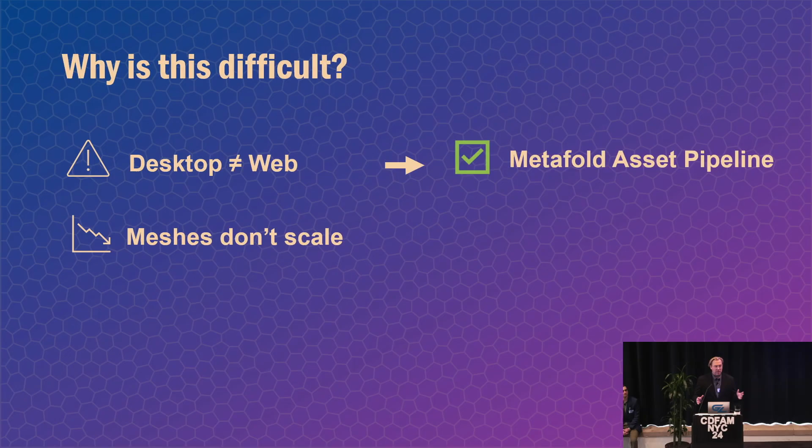The second problem, and you'll see more of this in the second part of the presentation, is that the digital materials platform leverages lattices and complex geometry to achieve these amazing mechanical properties. Representing these as meshes does not scale, partially from a computational point of view, but also just like a download point of view, a user experience point of view. You might wait a really long time to see the result if you're waiting for a very large mesh file.

So the Metafold platform at its core is our own implicit geometry kernel, and that's one part of our IP. The second part is a geometry streaming technology that lets you transmit volumetric data from a server to a client in 200 to 500 milliseconds.

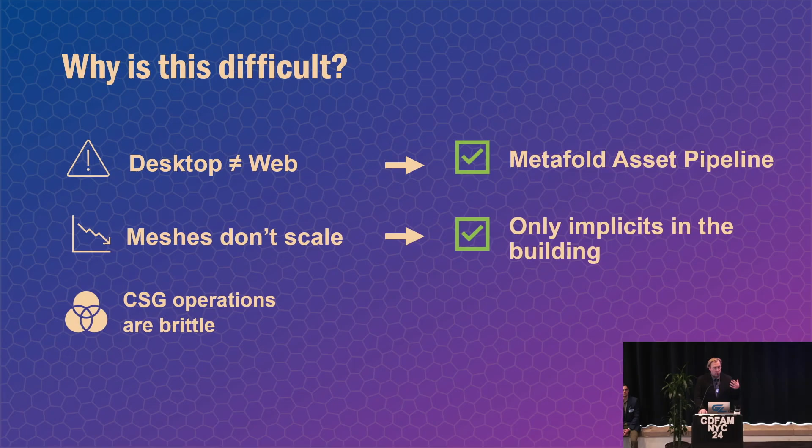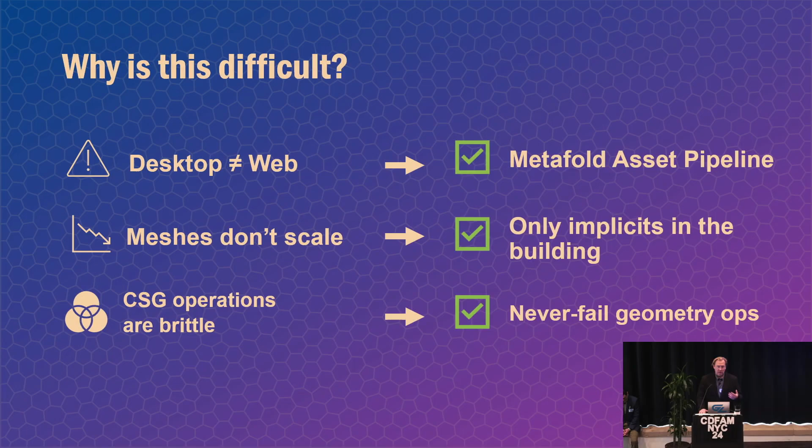The third problem is to create a final product using lattice geometry and infill type structures, you will inevitably need to CSG or union these structures back with an original design space, and these are notoriously brittle operations to complete. The Metafold geometry kernel shares with other implicit libraries the concept of a never fail geometry operation. Volumetric and implicit operations will never not work. They might not give you what you want, but they will never not work. Just having that functionality means that you can really build these automated workflows and get robust results.

So that was kind of like the glossy version of this collaboration. In reality, and I wanted to spend this slide to talk candidly about this, expectations and reality often didn't quite line up as we worked together with the General Lattice team.

On the Metafold side, our expectation was that the geometry would be the hard part. In reality, it was all the other stuff. It was the authentication system, the job system, just getting their devs talking to our devs on a development environment, and overall API architecture. These were things that we hammered out and worked together on over the course of the project.

A slightly more nuanced one: the team at Metafold were nothing if not math and geometry nerds, and so our expectation was that if we can build it, then you should be able to just build it. In reality, documentation, training examples, this idea of knowledge transfer is so important on these projects, and this was such a critical part to empower the General Lattice team and our other clients to use our API effectively. Our documentation site has gone through a whole overhaul, and it's excellent. You should all check it out.

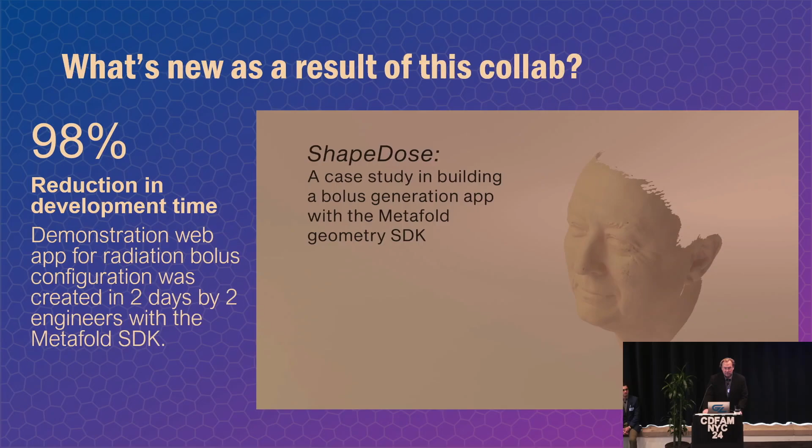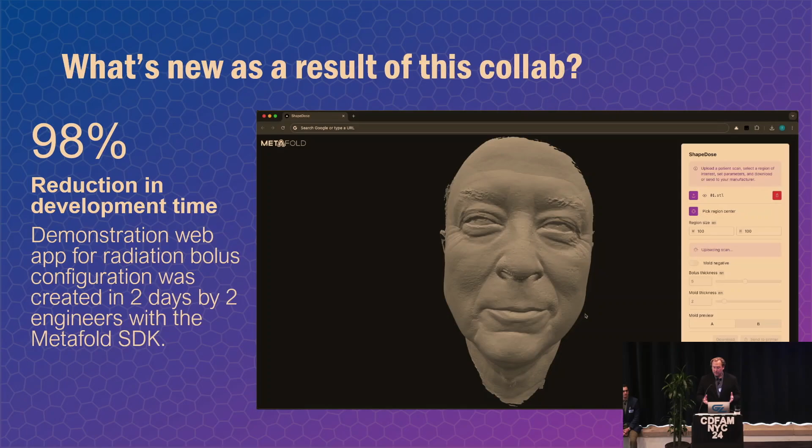So as a result of this collaboration, the Metafold product has made huge strides. Whereas it took a couple quarters to develop the functionality for General Lattice, which is a very nuanced application, we've been spinning up applications in 2 days.

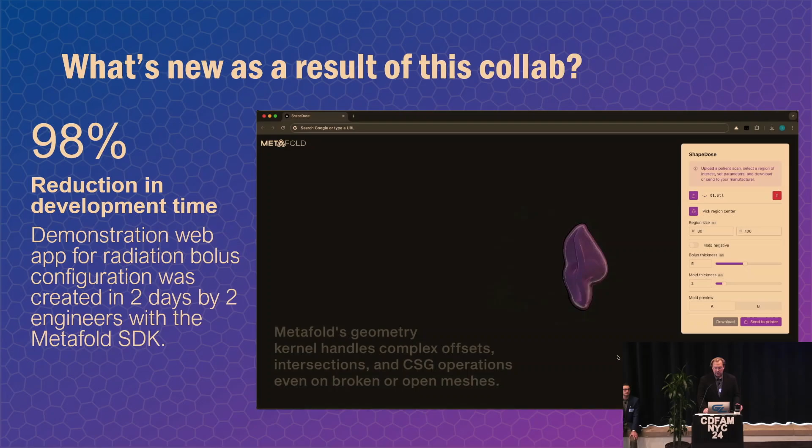This is a demo app that takes scan data. I could do the scan with a phone, like Polycam or something, and then generate the silicone shield for radiation therapy. On the web, a couple clicks, any clinician can use this. And apart from what it does, you can build this in a day or two.

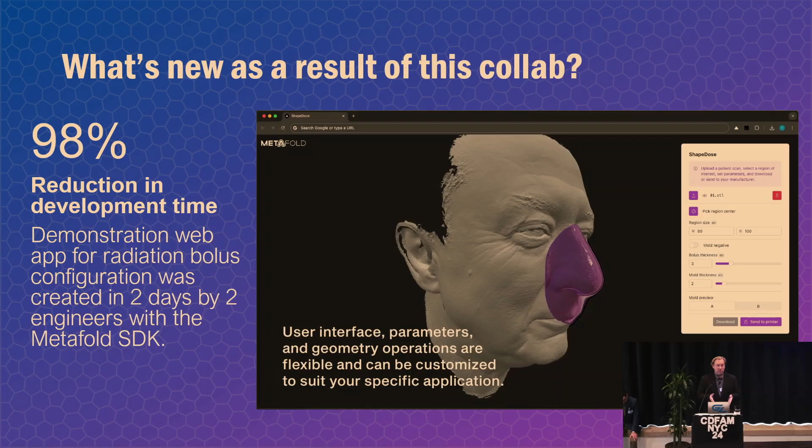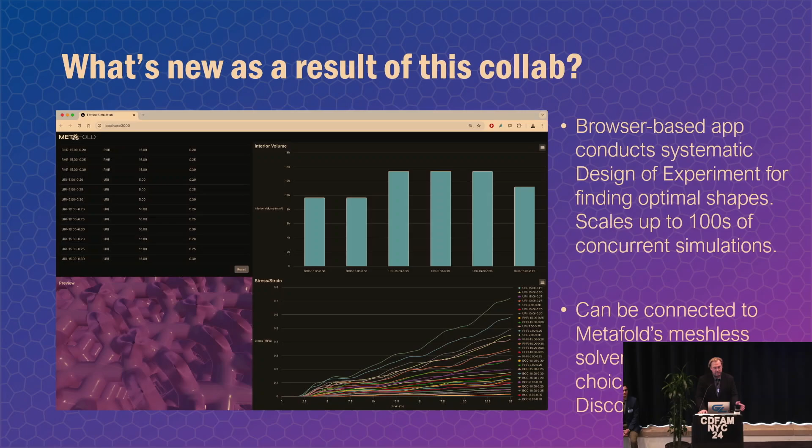Another functionality that has come up a couple times yesterday is the concept of design of experiment. Metafold offers a meshless simulation solver. It's batch runnable in the cloud, so you can run hundreds of concurrent simulations. We stood up a little design of experiment web app that configures all the different parameters, lets you visually inspect the structure, and then gives you back the full stress strain curve at 25% strain and some other metrics. Again, it's not so much what it's doing, but how you can build this and integrate it for your own needs, and this took us a day to stand up.

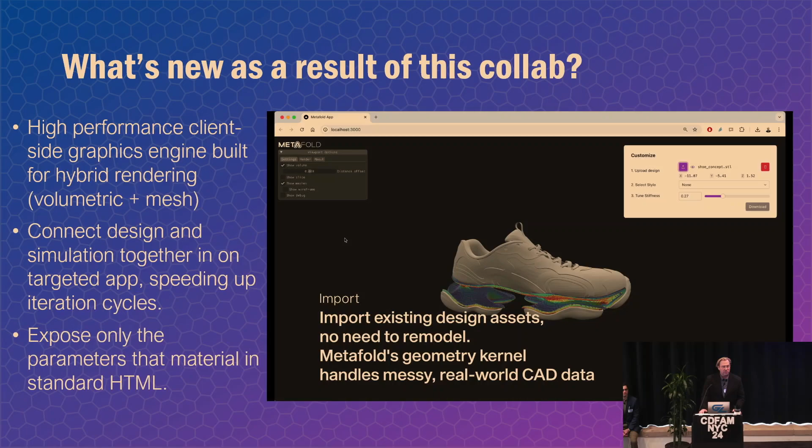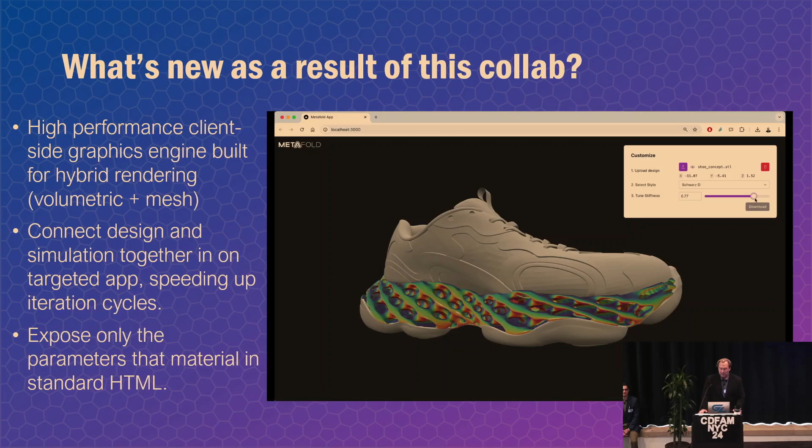We quickly realized also through the collaboration with General Lattice that we need to reinvent the client-side experience. So if there are any web devs in the house, you will probably be using Three.js. It's a mess in there. So we built this high-performance client. It's a WASM module, about under 2 megabytes in size, and it speaks directly to the volumetric data and does some hybrid rendering as well.

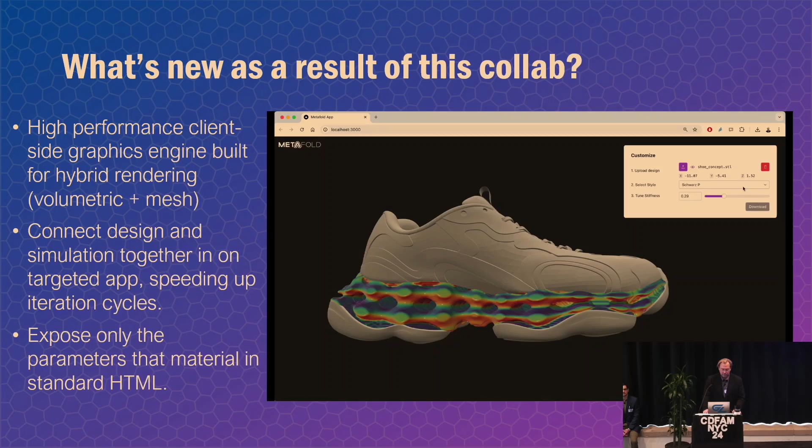So you can get really nice results and create these configuration apps and really polished visual experience applications with the Metafold graphics engine.

Using AI where it really works, I think, is another theme. Here we stood up a quick chatbot that can interact with the job system, and it also interacts with the Metafold geometry kernel and lets you run things like a CNC check. If you take the time to read through this text, you'll see that it lists the models that this person has access to, and then it checks to see if you can CNC mill the teapot with a 5mm bit. And that's a very specific example, but it's not faked.

It actually looks at the volume loss, having done the milling, and that volume loss is significant, so it concludes that this is not a good fit for CNC milling. It can also do similarity checks between models that exist on the platform as well.

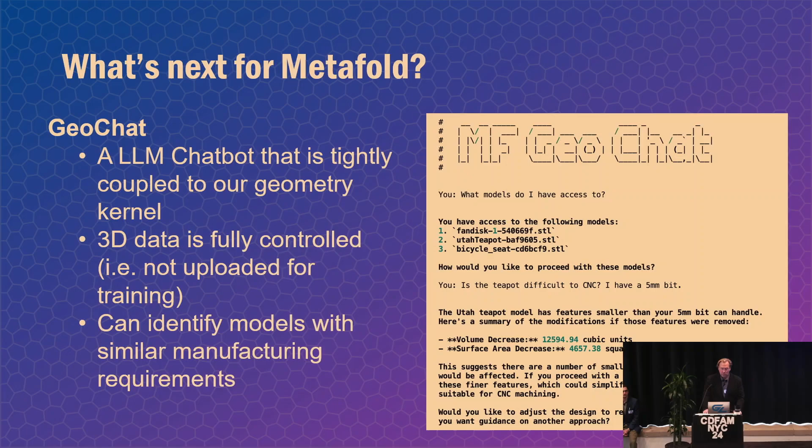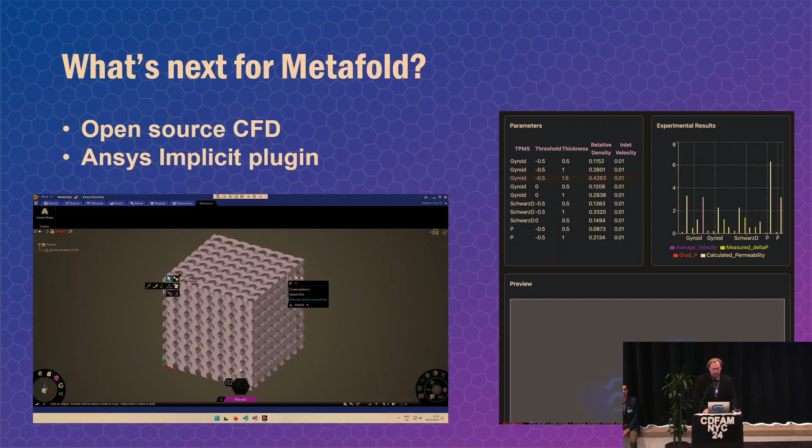We're ramping up these application development efforts, and so in the works right now is a plugin for ANSYS, getting implicit modeling working directly in ANSYS Discovery. This is something that's working very well right now and should save everyone a huge amount of time. We're also doing some open source CFD work using the Palabos solver. This would result in an open source like Docker container, which you can run on Google Cloud Batch or something like this, and this will really level up our ability to run these CFD solves.

Bringing it back to General Lattice, these were applications that we stood up to demonstrate the speed of development, but in reality, a full application like the Frontier one is much more nuanced.

Yeah, so thanks, Daniel, and I just want to reiterate how important a partner Metafold is, and talk about some of our other platform partners as well, from hardware to material to software. But every single one of the partners we work with is completely critical to our digital material platform. So I'll just hop into it there, and hop into it with a meme here.

So why is that useful? If we wanted to take a given foam application, maybe a simple foam pad, a traditional application engineer somewhere along that process is probably going to look like sketching to 3D modeling, quickly prototyping, but pretty early on they're going to have to start thinking about material properties of that application and what they need to meet. So what that process looks like for an application engineer making a foam pad...

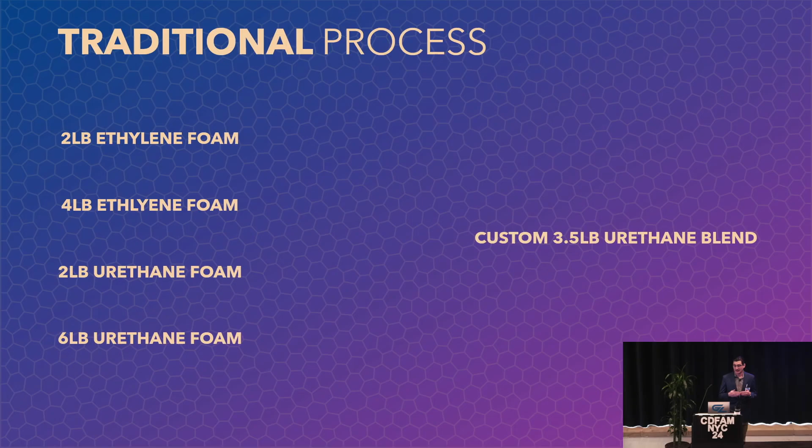I'm going to go to a material database such as MatMatch or Senvol, and I'm going to go look up all of the raw material properties that I need to meet for my application. This happens, probably happening right now, all the time.

So if you wanted to do this for additive manufacturing, if you wanted to integrate a metamaterial, something not just looking at the raw material but adding a geometry layer, how do you go about that? There's so many parameters, so many different expertise rabbit holes you can get lost in. Is it a gyroid? What cell type are you using? What thickness? What's the density? And if you compare this to how a traditional application engineer does something today...

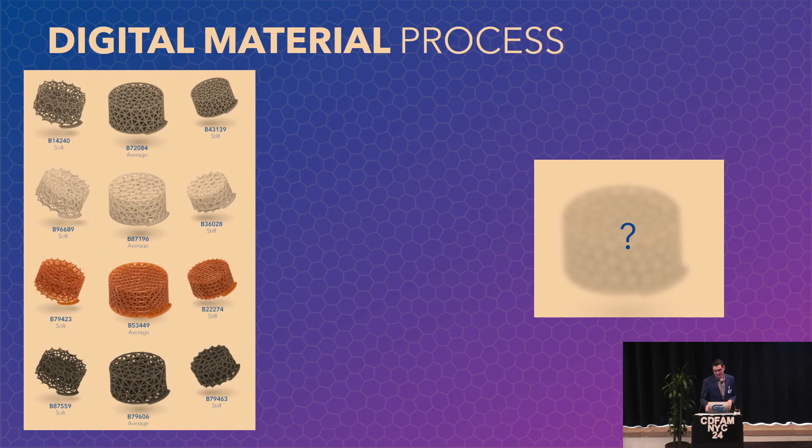If the application engineer wanted to go and use a lattice structure, they're going to have to go collect all of those material properties like a MatMatch would be done today. That's really what we want to recreate for Frontier. Frontier is a digital material solutions platform, so you don't have to do the design experiments, you don't have to be an expert and spend tons of money to go collect all of this data.

So why doesn't everyone do this? It's an intersection of several technical fields - 3D modeling, computer science, manufacturing, material science, and it goes on. So really what we want to do is streamline that for the user.

If you were to go and create a library of your own, which I know a lot of the OEMs may have - lots of studies that may exist on this part of the business or that part of the business - even if you have that data, how do you sort through it and how do you show it internally or to your customer in a way that's actually useful?

So you're dealing with all of the material property data up front. You're dealing with software - even if you have the raw material properties, can you actually design the shape and not just in a puck? Can you get that into a design space? And ultimately, if you've checked all those boxes, can you actually order more than 10 of those?

So the idea is, what if these digital materials were accessible to everyone? What if that application engineer could go onto an online database, query based on what's needed for their application, have an intuitive way to put that same property into their part, and then not just download the part, or pass it to their manager to figure out how to order it internally - can we take care of that final step as well as supply chain production and get that part in hand?

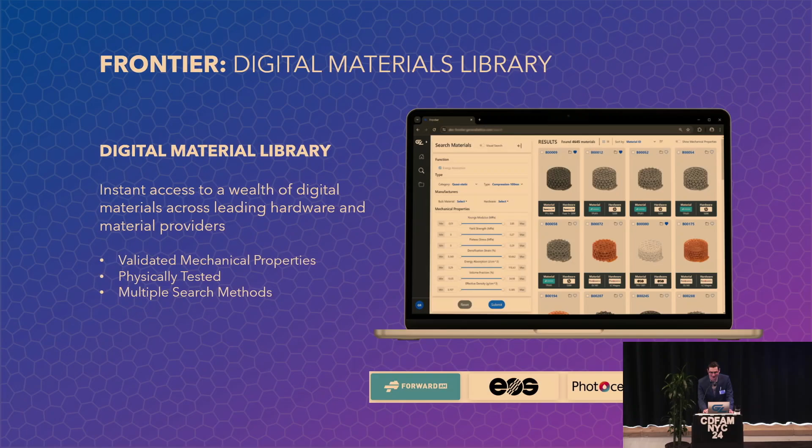We'll go into the integrator here, and this is super exciting for us to talk about Metafold's dynamic asset pipeline. Over the years we were doing Lattice as a service for the past five or six years—that was me sweating on the computer. At the end of the day, we came to a great automated way to create lattices in your parts, but we had no way to scale that. That's where Metafold came in—having their APIs and implicit kernel allowed us to stand this up from an internal piece of software that was powerful, to get it out to the masses instead of just one or two people.

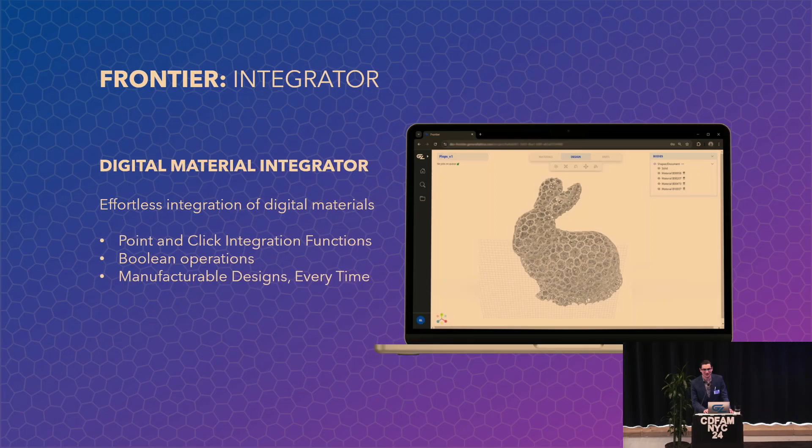And then third, on the supply chain side, working with Wilson Ball was a really exciting project with tons of challenges, not just on the design side, but also on supply chain. Production parts are very difficult to get correct with repeatability—how do you ensure part A printed from one supplier matches part B? So finding industry-leading partners to develop SOPs for these intricate structures is our goal, to get repeatable production parts across the industry.

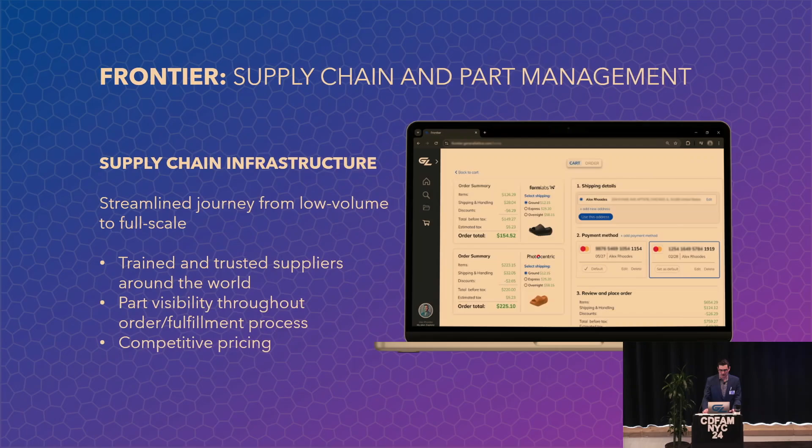Highlighting all these partners across our three pillars—material hardware, software, and supply chain—what's exciting to us is we have no business trying to do material, hardware, software, and supply chain all on our own. So we're trying to gather the industry together with these leaders to have a platform that gives you a complete solution, so you're not on your own from square one to part in hand.

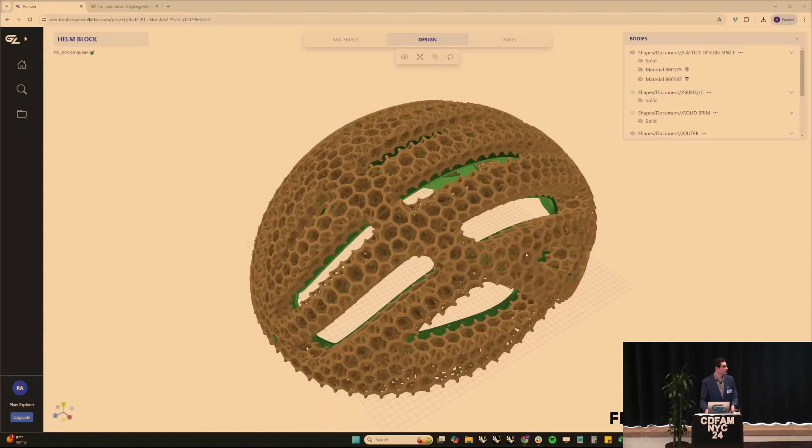So just quickly, this is a demo of Frontier. Here I'm prepping a file I got from GrabCAD in Fusion and Rhino. I'm going to upload this step file into Frontier, as we can see here with the different parts. I've identified what digital materials meet the relevant properties for my application, add those to my folder, select what part I want the lattice in, and slap the lattice in.

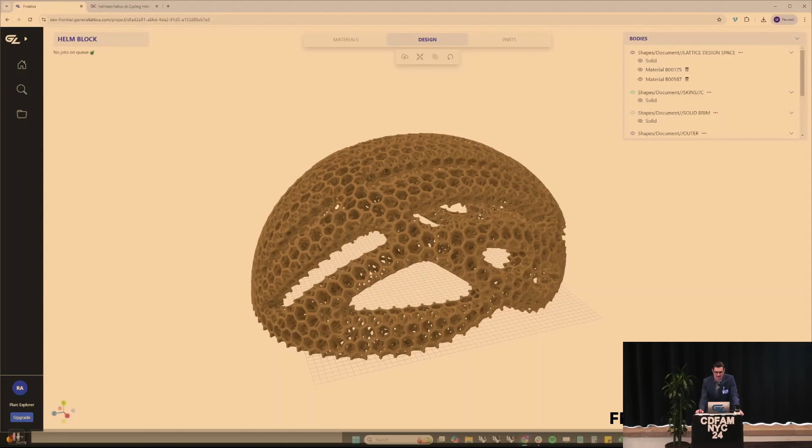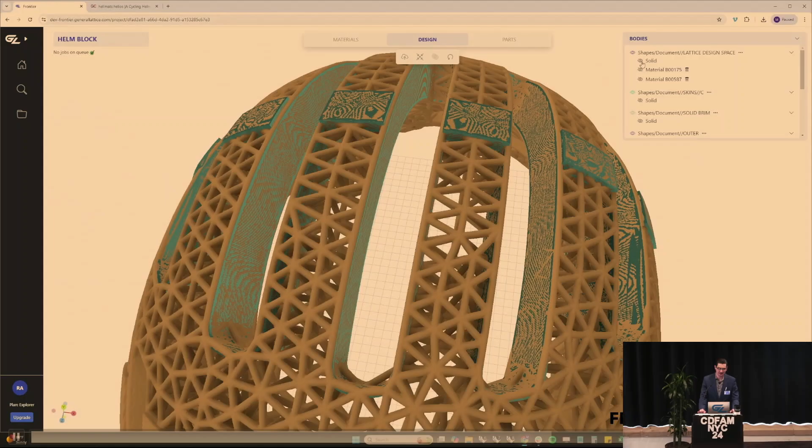Now what's really exciting is we recently added Boolean features, so we can import step geometry from Fusion or Rhino. We're not trying to recreate the modeling process—that's a key point, we don't want you modeling features here. Model that in CAD, what it's good at, and upload to Frontier. If you prepare your model appropriately with skins and added geometry, and deselect geometry you don't want, you can get a very nice final result, all in the web, very quickly.

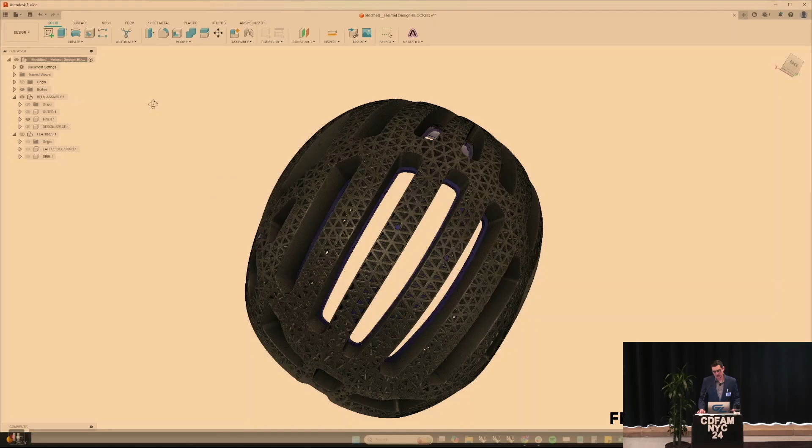This is showing our ordering system and download abilities, and ultimately you can bring your geometry back into your CAD workflow. So here's showing our lattice back in Fusion and back in Rhino here.

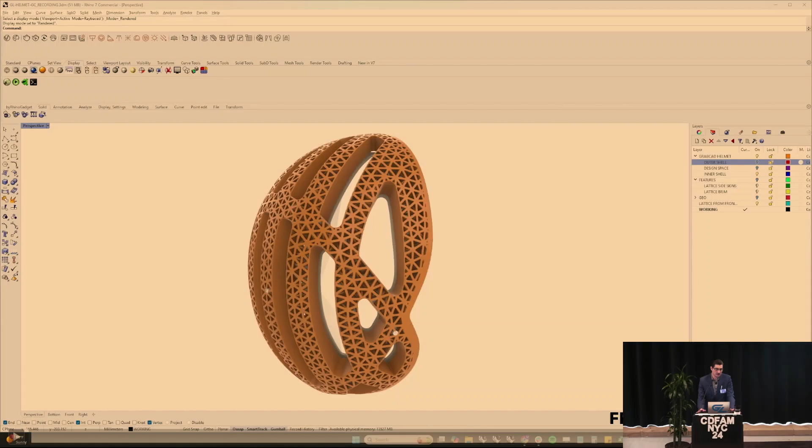And what's really exciting for the user is solid modeling and implicit modeling, multi-format modeling—it's very new, very interesting, and until the industry direction is clear, we're excited about supporting all these file types, implicit and explicit geometry, allowing the user to have the most decisions possible. Being able to export as implicit data, as mesh data, and import BREP data allows users to choose the correct data type for what they're trying to do long term.

Looking forward for General Lattice, we're excited about growing our platform partner network—anything under the sun, from material to hardware—the more partners we can have, hopefully the more applications we can support. For added design functionality in the integrator, we'd like to add more geometries, more unit cells, gradient functionality, different import options beyond just step or BREP, and expansion into rigid data sets. Right now we're focused on foam replacement applications—we wanted to start small, focus somewhere, and build this database into wider data sets to accept more applications. I think that's it from General Lattice.